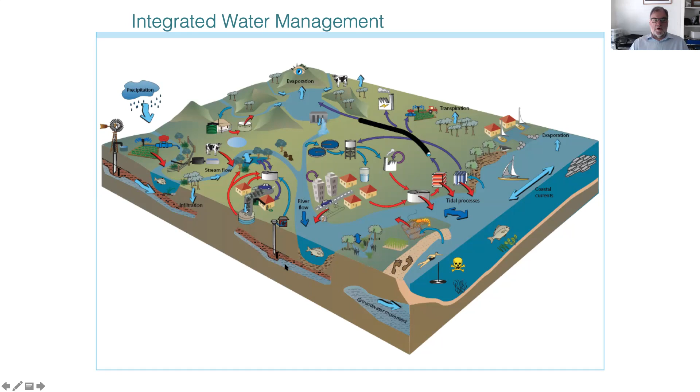This picture, I think, is useful because it lets us think about things like water recycling, water-sensitive urban design, which I think you refer to in Taiwan as sponge cities. It also considers things like desalination and the use of groundwater, trying to give a whole picture of the water cycle.

This dam actually has a flood storage capacity, so its normal level of 100% was overfilled in this case as the dam was receiving floodwaters. So the city I live in can be one year in drought and indeed the next year in flood.

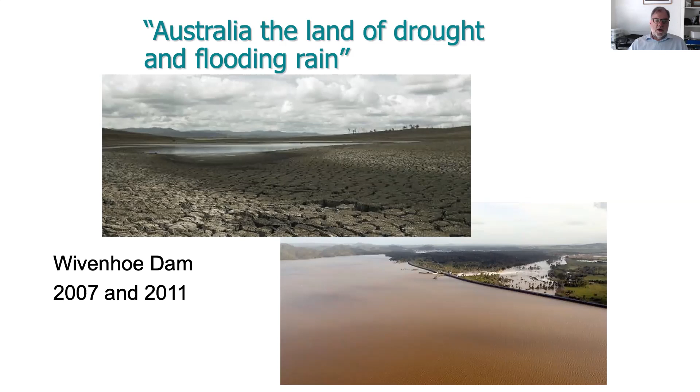The other thing I do want to talk about, and you may have seen this work that's been developed in Australia, is this notion of the continuum of how our cities develop, where we start as water supply cities, we move to sewered cities, drained cities, waterway cities, water cycle cities, and indeed water sensitive city.

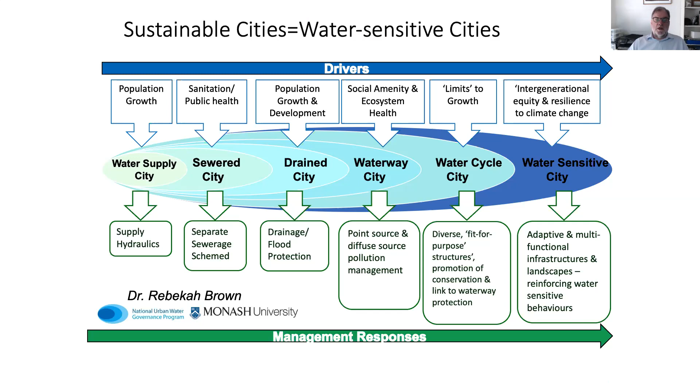And this is then I think where Taiwan is wanting to think about in the space of sponge cities. For me, a sponge city or a water sensitive city is where we are actually thinking about using the whole water cycle. Particularly we're thinking about water recycling, we're thinking about the use of stormwater, and about keeping water in the city to keep it cool.

And indeed, a few years ago, as we were working on this notion of water-sensitive cities, we did a bit of an evaluation of where some of our cities are. We think from a policy point of view that Brisbane is maybe between waterway city and water cycle city, similarly for Melbourne. So this is where we aspire to be, or our policies suggest that we would like to be.

But the actual fact is that we're still in these places around waterway city. I think of waterway city as the city where you're looking at your waterways and thinking of your waterways as enhancing your city. You're recognizing that you don't want to pollute those waterways. But as we move towards water cycle city, we are actually thinking about perhaps using recycled water or stormwater in our water supplies.

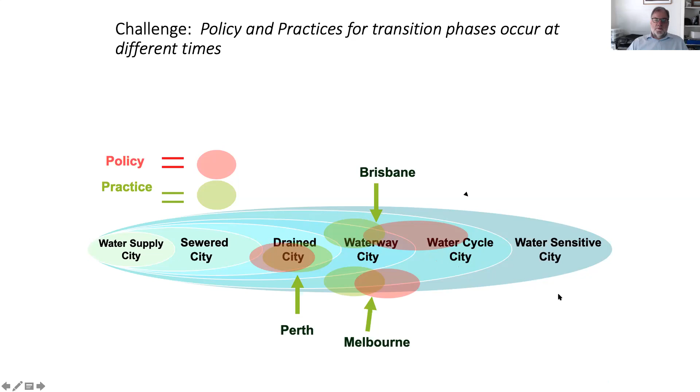Perhaps enough of context. One of the things that we experienced in southeast Queensland, we referred to as the Millennium Drought. We had a drought that went for about 10 years, from the turn of the century, around about the year 2000, until we started to receive drought-breaking rains around 2009.

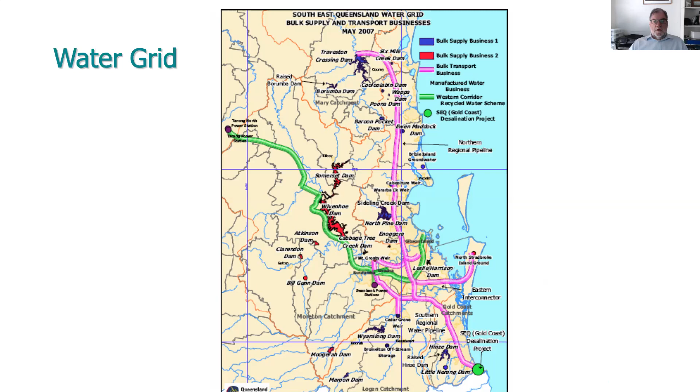So we had our dishwashers, we had our toilet flushing systems with large volumes, we had shower roses that produce large volumes of water. So we're using 340 litres per person per day.

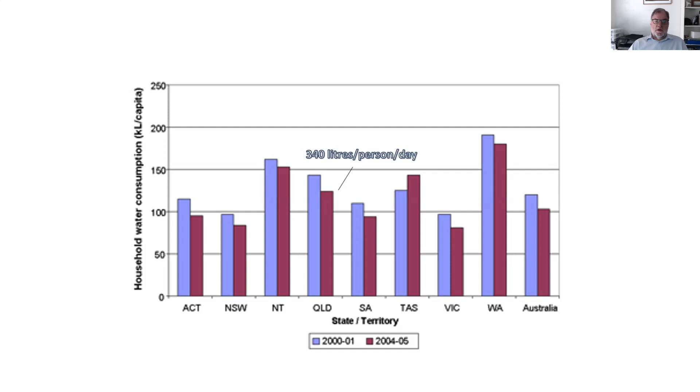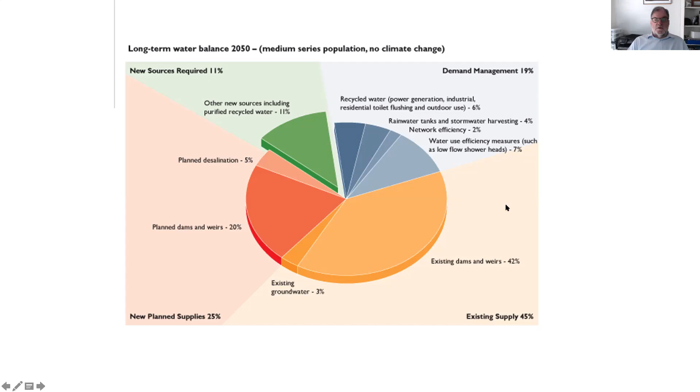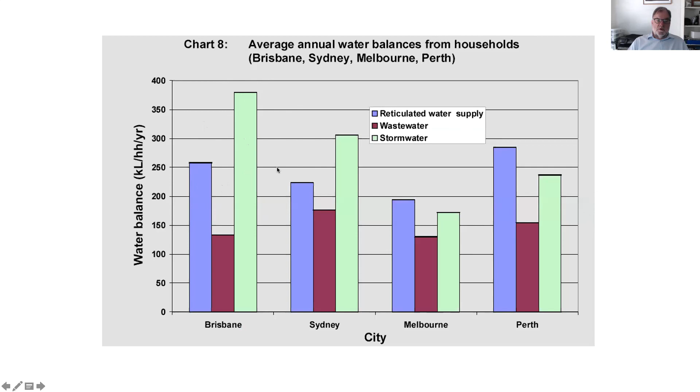So that gives you a quick picture of what we do in Southeast Queensland. I think something else to remember is, depending on where you are, the amount of stormwater that falls on your city. In the case of Brisbane, it's this green bar. There's more stormwater falling on the city than we actually use for drinking water. So maybe we can be thinking about stormwater as a source of water supply, which we haven't typically used in our cities.

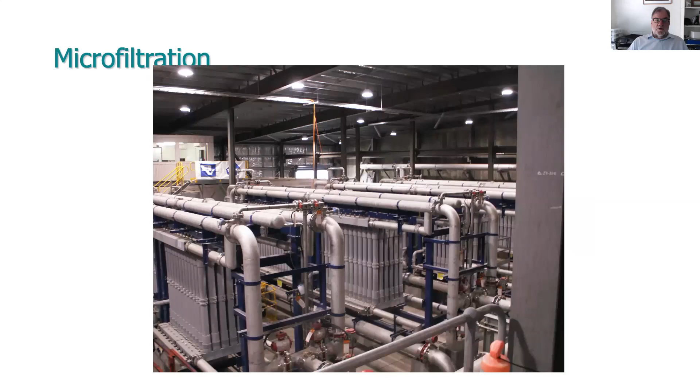And these are just some photographs of the facilities of reverse osmosis microfiltration that we're using in our desalination and water recycling plants.